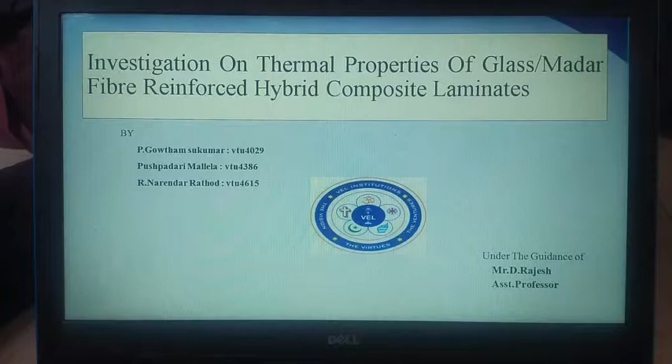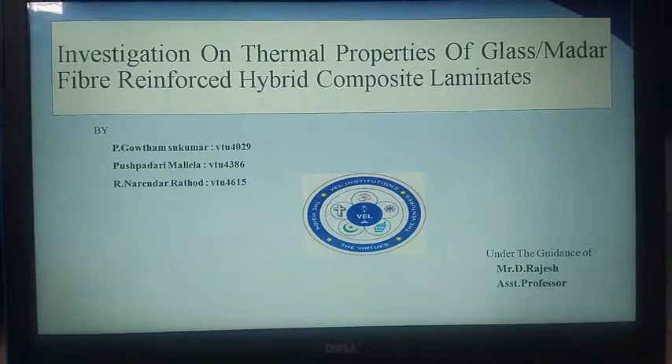Our project is about the thermal properties of glass and Madar fiber reinforced composite laminates. We created the composite laminates with the use of glass and Madar fibers, and then we tested the thermal properties of that. This is our presentation layout.

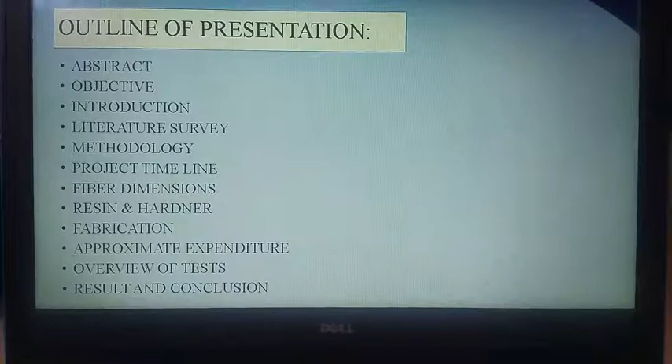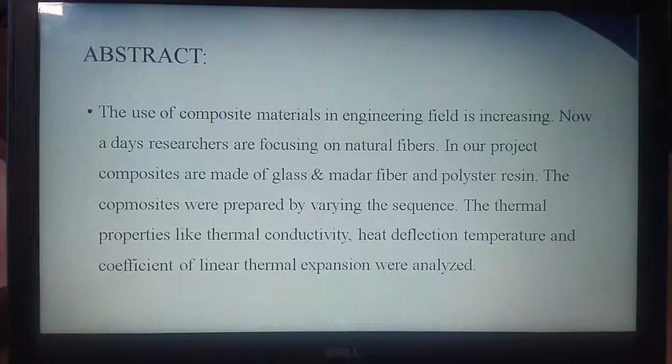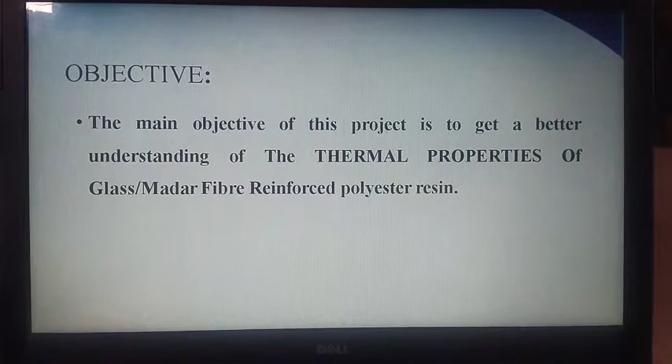Nowadays, researchers are more concerned about natural fibers as they give high mechanical properties like tensile strength, etc. So we decided to study the thermal properties of that. As I said earlier, the main objective of our project is to study the thermal properties of glass Madar fiber reinforced composite laminates. We used polyester resin for these composite laminates. These are some of the literature papers we have studied and surveyed.

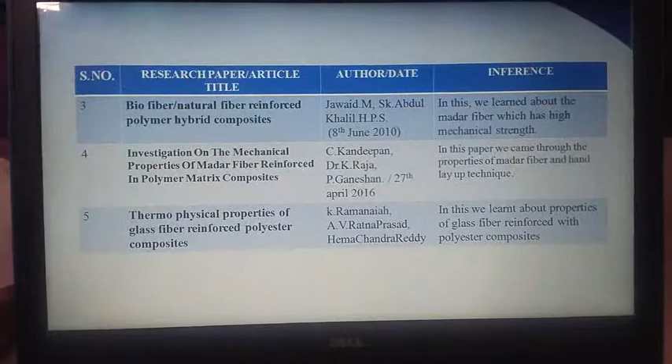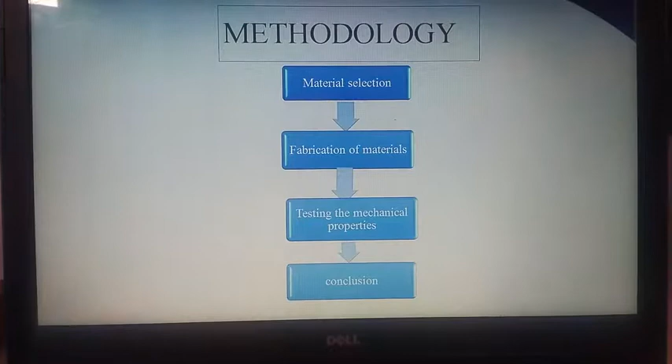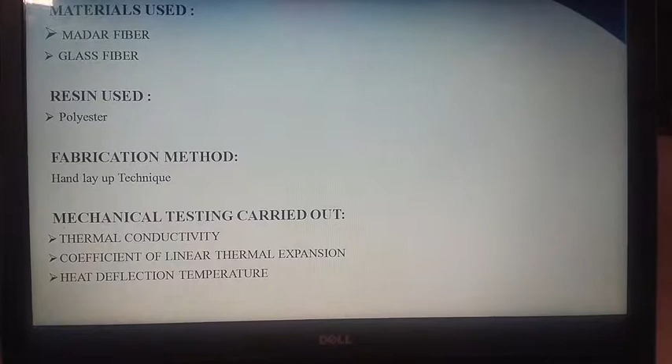This is our methodology. First, we selected the materials and then we fabricated them. For fabrication, we used the hand layup method. Then we tested for thermal properties, and finally the conclusion. Materials used: as I said earlier, we used Madar and glass fibers. The resin we used is polyester resin, and the technique we used is the hand layup technique. These are some of the tests we have made.

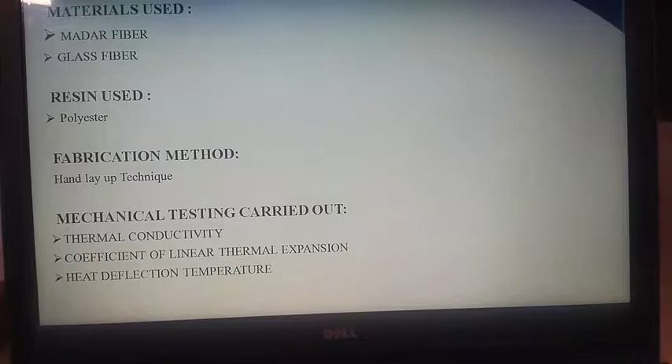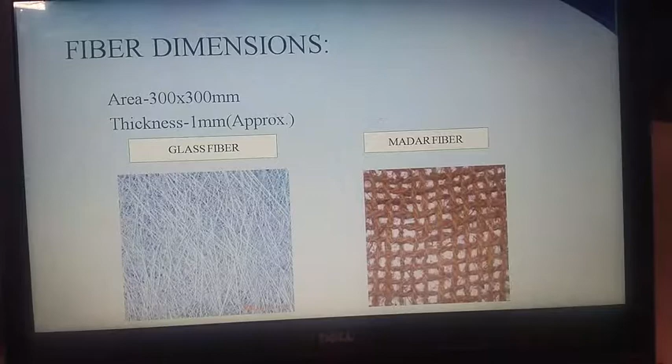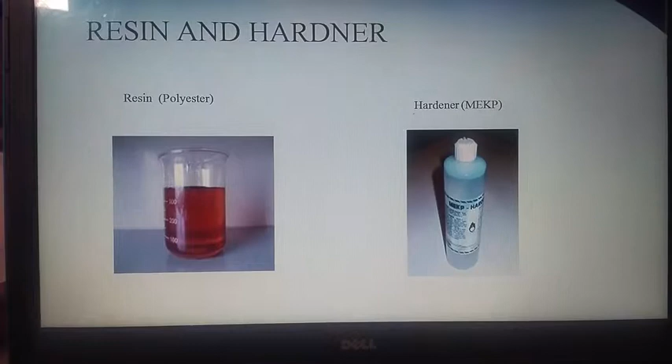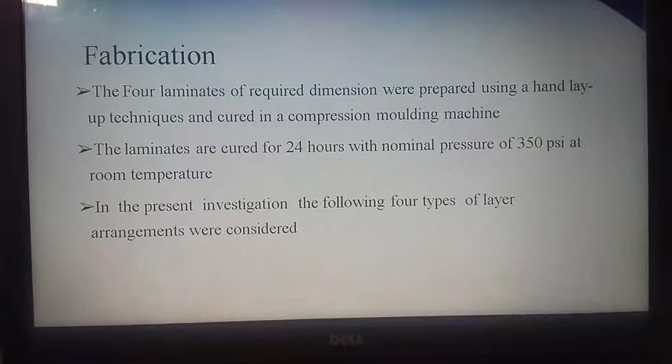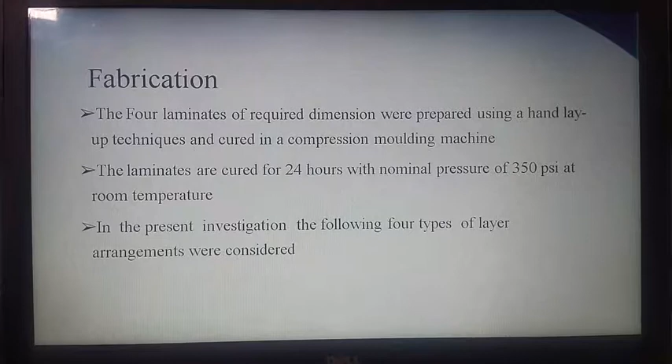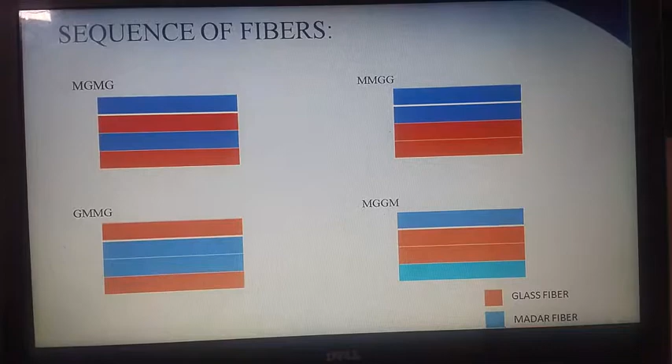Fabrication: we use the hand layup method. It's a molding method, and we use a curing time of 24 hours and 350 pounds per square inch. Actually, we made 4 sequences of the materials: Madar, glass, Madar, glass; Madar, Madar, glass, glass; glass, Madar, Madar, glass; Madar, glass, glass, Madar. We differentiated the properties of these and we studied which is better and which is least.